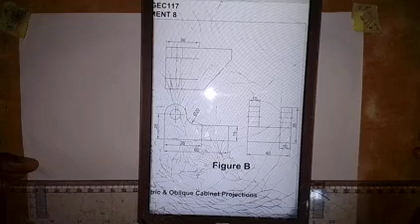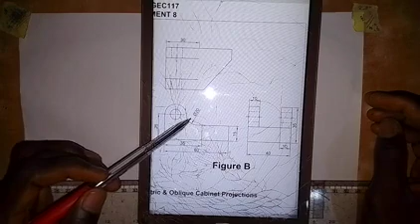Here we'll be working on this problem, as these views are given in third angle orthographic projection. This is the front elevation, this is the plan, and this is the right end elevation. Based on the dimensions given in the front elevation, the distance from here to here is 60, from here to here is 35, and from this point to the center of this circle, the distance is 25. The diameter of this curve is 20, the thickness from here to here is 15, and in the plan, we have the distance from here to here to be 30.

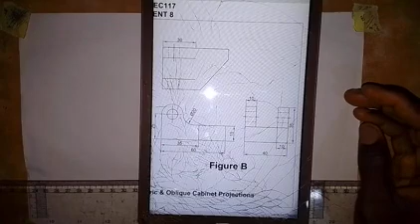Then on the end elevation, we have the distance from here to here to be 40, the thickness of this is 10, and it is also shown to us that it is 10 here. So this particular dimension is meant for the distance from here to here. So the thickness of this one is 10 as given here, and the total height from here to here is 35. We are going to make use of these dimensions to produce the isometric view of this object.

But first of all, we need to know the lowest point. As it's not indicated, I'm choosing this point as the lowest point, which is this point here in the front elevation. So now, let's see how we can get the work done.

The first thing we are going to do is draw a horizontal line. I will draw a short horizontal line here, and then with my 30 degrees set square, I'm going to draw a line in this direction. Then at this point, I'll draw a vertical line. Then I'm going to take a measurement of 15 millimeters here, and from this point, a measurement of 35 millimeters. So we have this to be 35.

Here I'm going to draw a vertical line like this. Next, I need to extend this line forward like this. I'm going to add 25 to that 35 to make it 60. So this is 25 from this point, making it 60 millimeters.

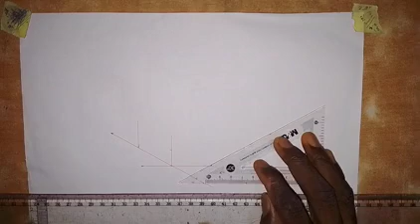From this point here, I'm going to draw a line in this direction, and at this point I will erect a vertical line. Then I'll take a measurement of 40 millimeters, and out of this 40 I will take 10 to this side. Then at this point here, I'm going to draw a vertical line, and also at this point I will draw a vertical line.

So I'll draw a vertical line at this point, and this 15 that we have taken here, I'm going to transfer it to this line and also onto this line. Then I will take it from here to this side. Then I'll come to this end here and draw a line in this direction. Then I'm going to transfer this point on this line, to the end here.

Then these two points here, this point and this point, I'm going to join them together like this. This is a non-isometric line. Then I will come down here and join this together. So that is the shape that we are given here in the plan.

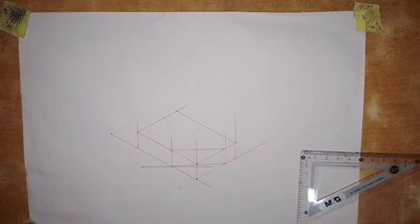Okay, so let me shape this part for us to see what we have done. This line I will make a thick line, and this line will also be a thick line from here to here. Then we also make this line a thick line, and this line will also be a thick line from here to here.

So then this line will make it a thick line, and then we make this line a thick line. Okay, so I will still leave the rest for now, but you can see that the shape that we have in the plan has come out as we see it there in the plan. So this is the shape, and this is how we have it here.

So the next thing that we are going to do is to create this part here. So what I'm going to do now is that the thickness is 10. So we are going to take 10 millimeters from this point. So from this point we take 10 millimeters on this line. So this is 10 millimeters. And then from this point also we take 10 millimeters inward.

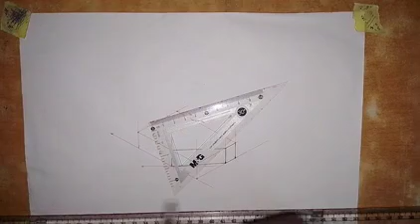And then we are going to draw a line from this point here in this direction. Okay, and then we also come here, we do the same thing, draw a line. Okay, so on this point I will erect the vertical line. So erect the vertical line on this point, and then the total height is 35. So the total height is 35 and we have taken 15 out, so the balance is 20.

So we take a measurement of 20 millimeters here. So this is 20. So we are going to create a square of length 20. So I will come here and also take 20 to this side. Okay, so at this point I'm going to draw a vertical line. So draw this vertical line, and then this 20 that we have here, we transfer it and we take it forward. So we have it like this.

Alright, so then I'm going to locate the midpoint of this, which is 10 from each end. So we have this, and then for this also we have 10. So here we have 10 at this point. Okay, so I'm going to draw a line from here to the other side, and then I will draw a line from here down here. Okay, then we join the longest diagonal together like this.

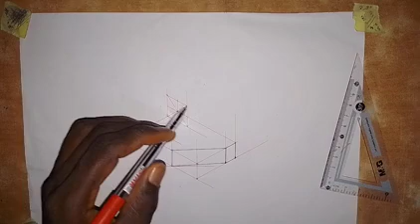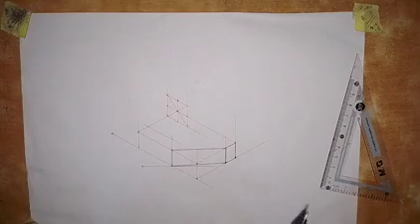Okay, so to draw the curve that we have here, I'm going to make use of my French curve. So we have this point, and then we have this point, and we are joining these 2 points together and these 2 points together to form the curve. Okay, we only have the curve up here, not down, and we are not making use of what we have down here. So I'll just come here, make use of my French curve coming to these 2 points here. So we join these 2 points together like this.

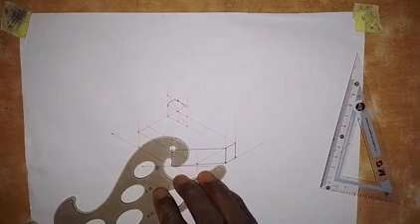So join these 2 points together, and then I make use of this, and then I will draw the curve, just to touch this line here. Okay, I mean this line, so to touch it. Okay, so we are going to draw the whole of it. Alright. Okay, so we have it like this. So that's what we have there.

And then we have a circle on this face here. So a circle of diameter 10. So the radius is 5. So we are going to take 5 millimeters from this point. So 5 millimeters up, and then 5 millimeters down. And then on this side, we take 5 millimeters to the left side and 5 millimeters to the right side.

Okay, then I'm going to make a square on this face here. Alright, so this is the square. So what I'm going to do now is that because this is small, I'm going to use my hand to produce the circle on this face. So we join these 2 points together like this.

And then these 2 points, we join them together, just take it easy and easily join them together like this. And then these 2 points, we join them together like this.

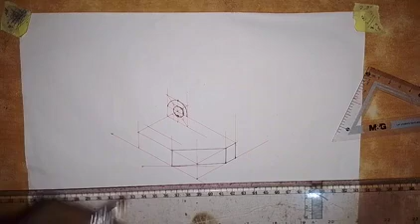Alright, so we have the isometric circle on this face. Because the square is small, that's why I use my hand to do it. So the next thing that I'm going to do here is that, we have the curve on this side, so I'm going to do the same thing on this side.

So I'm going to draw this line to this side, and from this point I will draw a line, and from this point also we draw a line to this side. From this point we draw a line to this side. I'm coming to this point here, we draw a line to this side.

So I'm going to take a measurement of 10 millimeters. So this is 10 millimeters here from this point, and from this point we take 10 millimeters. So 10 millimeters to this side, and from this point we take 10 millimeters to this side, and then from this point here, we take 10 millimeters.

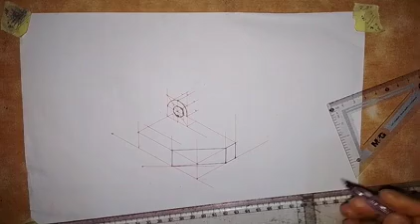So these points we are going to join together with the use of a French curve, okay? And it goes like this. So I'll make use of this part here. Okay, so I'm going to join. Let me start with these 2 points. So it goes like this, and then these 2 points I'll join together like this, and then these 2 points I'll join together like this. Then this line I'll make a thick line from here to here.

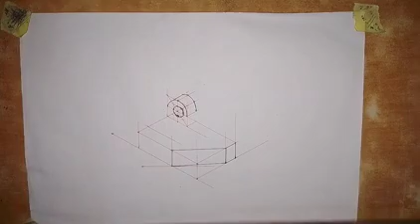Now, there's a curve that we have that goes like this. The diameter of that curve is 20, while the radius is 10, okay? So what I'm going to do here is, okay, from what we see, I think the diameter as we are given is 20, so the radius is 10. But that cannot be 20, it is 10.

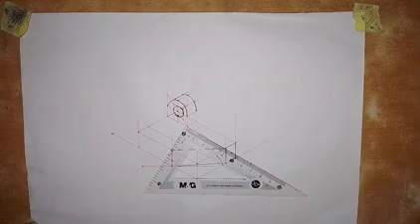It cannot be 20 because the length that we are given from here to here is 30. So we have taken 20 out of 30, the balance is 10. So that diameter cannot be 20, it is 10. So I'm going to take a measurement of 10 millimeters here, and on this line we already have 10. So I'm going to draw a vertical line from this point, and then we have already formed a square on this face.

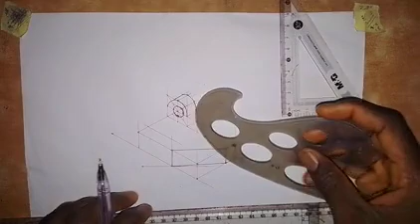So what I'm going to do now with my French curve, I will produce that curve. So I'll just set it like this, or I should make use of this one. Okay, so this is better, this is more close. I just rotate it. So I will draw the curve from this point, and it goes like this. Okay, so we have this.

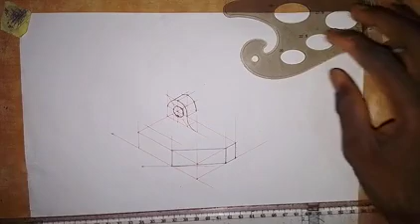So we also have the same thing on this side. Okay, so let's quickly do that. For the one on this side, I'll pause the video and do that.

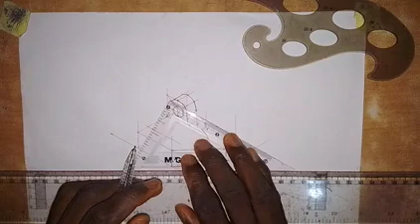Okay, so I need to transfer this 10 that we have here to this side like this. Then I will draw a vertical line at this point. Then a line at this point is still that 10 that we have. So I will join this together like this. Then with my French curve, I will do the same thing.

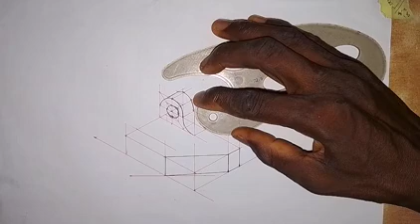So let's see it. With the French curve, I'll just set it as I set it for the previous one I just did. So I'll set it like this, okay? Then I will draw the curve, or the arc, like this. Alright, so that is what we have here. This line is going to be a thick line, so let's make it a thick line at once. Then this line is also a thick line.

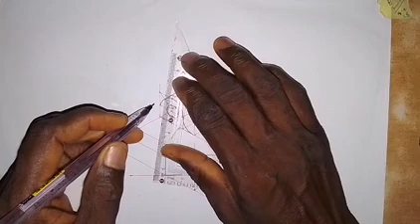So what I'm going to do now, I'm going to replicate the same that we have here on this side, but I will pause the video because of time. Alright, so this is the object, and it's as simple as I said. What I did here is what I repeated on this face. So all you have to do is to practice, and when you practice this, you become a master at it.